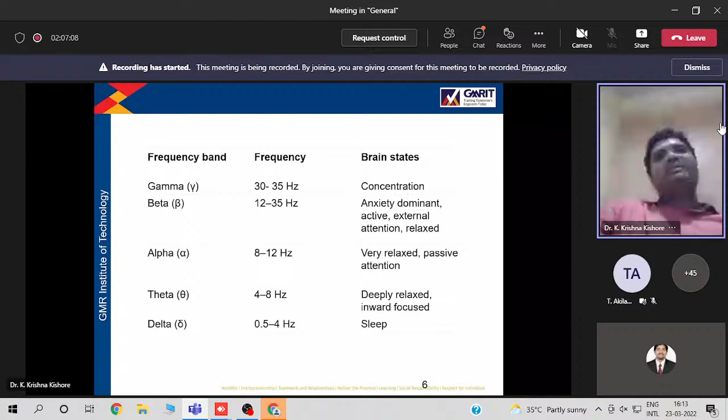Basically, we think with different frequencies. If a person is concentrating, thinking, or taking any decision with a frequency of 30 to 35 Hz, the brain is more concentrated towards his work. If the thinking frequency of the person is around 12 to 35 Hz, we call it beta, where he will have more anxiety and more attention for external activities.

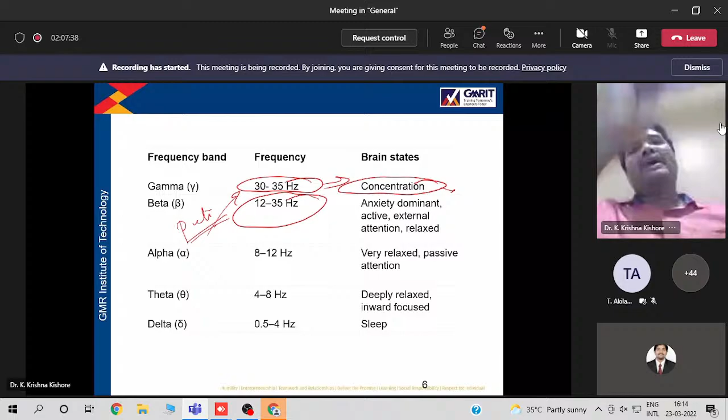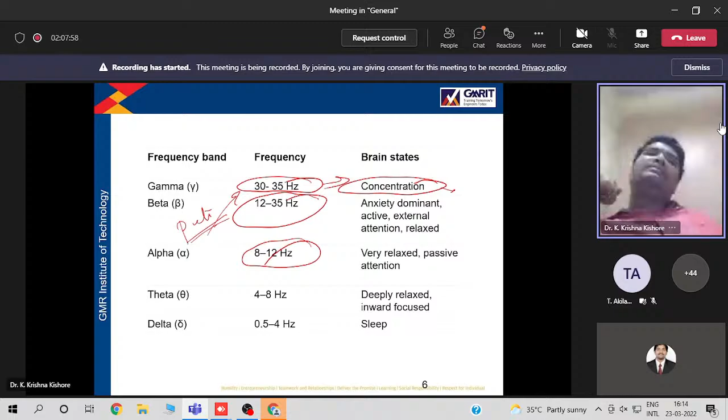If a person's frequency is around 8 to 12 Hz, that is the alpha range, the relaxation state of the mind. So when you are in a relaxation state, the frequency of your brain waves will be around 8 to 12 Hz. When you are in sleep mode, it is the delta range, where the frequency of the brain waves is around 0.5 to 4 Hz.

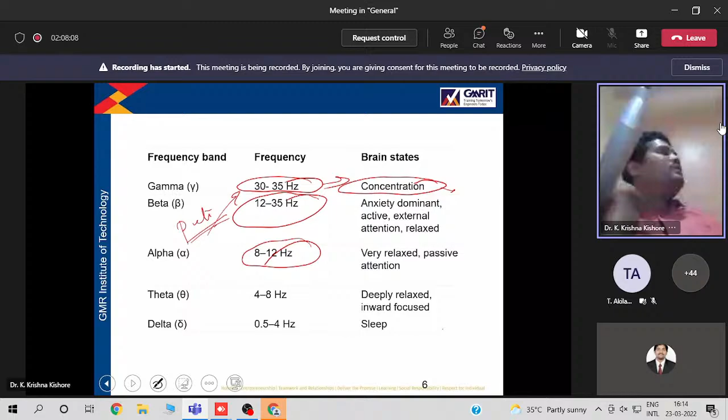So coming to the internal structure of a basic biological neuron, it will have dendrites. Dendrites are the inputs which take data from the sensory organs like eyes, touch, ears, etc. These dendrites will take the inputs and these inputs will be transferred to the cell body. The cell body, which we are considering as a processor, is nothing but the nucleus or soma. The synapse is the link between one neuron and another neuron, and the axons are nothing but the outputs.

So if you take the artificial neurons, in place of dendrites we have the inputs and we have the weights. And the artificial neuron is a combination of a linear combination of inputs with weights and an activation function.

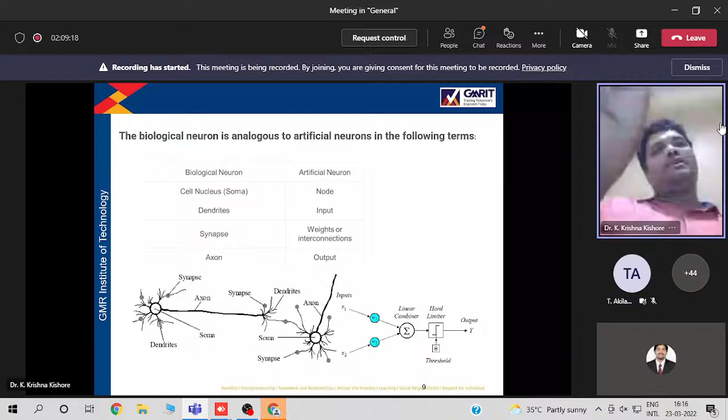So if you compare a biological neuron and an artificial neuron, what we call a cell in a biological neuron, the processing unit, is considered a node in the artificial neuron. The dendrites which take the inputs from the sensory organs are considered inputs in the artificial neuron. The synapses which connect one neuron to another are nothing but the weights, the interconnection between these two neurons. And the axons are the outputs. So this is how the model of ANN is derived from the human brain.

Usually during childhood we used to do things repeatedly, like when we wanted to learn a particular lesson, we used to learn it 10 to 15 times. When you are learning for more time, the strength of the signal generated by the synapses will be very high. That is nothing but sodium, Na plus. When the signal generated by the synapses is very high, the bond between one neuron and another will be very high, which indicates that you can remember that particular event for a long period.

So whenever you want to recall it, there is a link between this neuron and that neuron. That link is very highly bonded, so you can easily remember things. That is the major reason why during school age, teachers used to tell us to learn more times. When you do a particular task many times, the bond of the synapse link will be very high so that you can easily remember things.

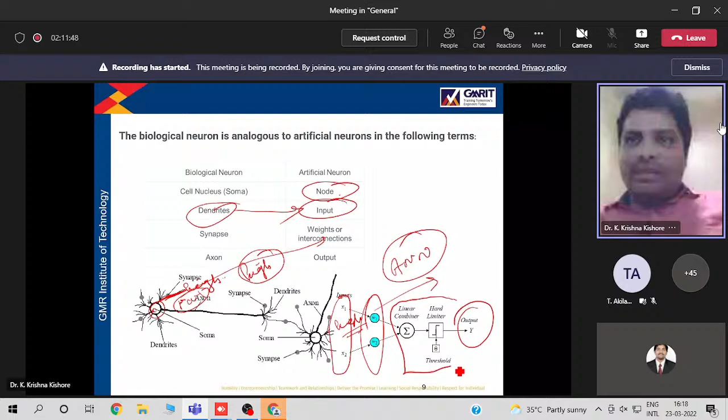So the dendrites can be replaced with inputs. The soma or cell body is replaced with the node, and the synapses, which are the interconnection between one neuron and another, are replaced with weights, and the axons are nothing but our outputs. So the basic artificial neural network will have inputs and nodes. The combination of the linear combination and threshold or activation function can be considered as one node. For simplicity we show it differently, but each neuron will have the summation of inputs with weighted vectors as well as activation functions. So this is the basic difference between a biological neuron and artificial neurons.

Suppose you take a single neuron having 5 inputs x1 to x5, and each input has some weight w1, w2, w3, w4, w5. Here the summation unit will do the operation x1 w1 plus x2 w2 plus x3 w3 plus x4 w4 plus x5 w5, and this resultant is given to the transfer function. This is nothing but the activation function. We are going to discuss different types of activation functions in the next point. Depending upon the activation function, you will get the output.

In a similar fashion, suppose any insect has hit your body, the particular skin organs will send data to the dendrites that there is a problem. This will be given to the soma or cell body, which immediately will pass a high electric pulse signal to the synapses. So immediately your hand will move and hit that insect. This is the operation that happens inside the neuron. The same thing happens here. If the weight of a particular input is very high, you will react to that particular input. So this is the structure of a single neuron.

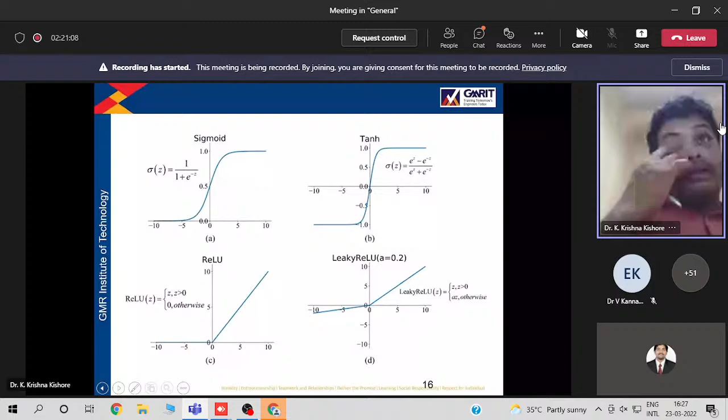And the second activation function is the sigmoid activation function, which indicates that if the value of y of x is greater than 0.5, the output of the particular neuron will be 1. If the value of y of x, which is nothing but the combination of input vectors with weights, is less than 0.5, the value of the function is 0.

In a similar way, we have the tanh function, which will have both sides. That means here the activation functions will be applicable to more than binary. If the value of the linear combination y of x is greater than 0, then the output of the particular neuron will be 1. If the value of y of x is equal to 0, the output of the neuron will be 0. And if y of x is less than 0, the output will be -1.

So when you are using the tanh function, each neuron at each stage has 3 outputs, depending upon the input combination. Suppose I had 2 inputs, and W1, W2, W3, W4. Let us assume that my intermediate output is H1, where H1 is equal to X1 W1 plus X2 W2. If this particular value, after taking the linear combinations, is less than 0, then with tanh as the activation function, that function will provide an output of -1. If it is equal to 0, that function will provide output as 0. That means this neuron output may be 1, 0, -1, which is given as an input for the next stage.

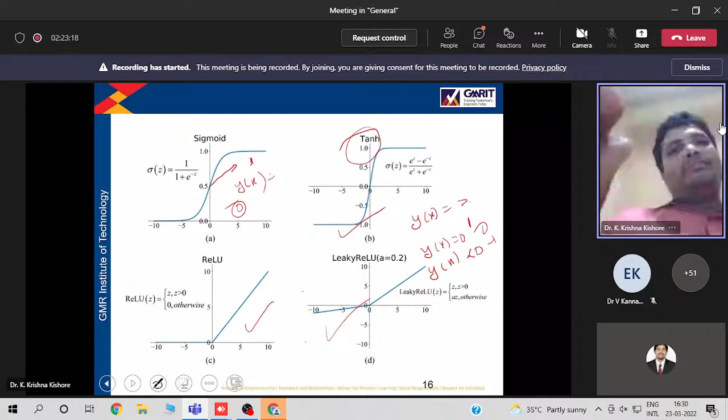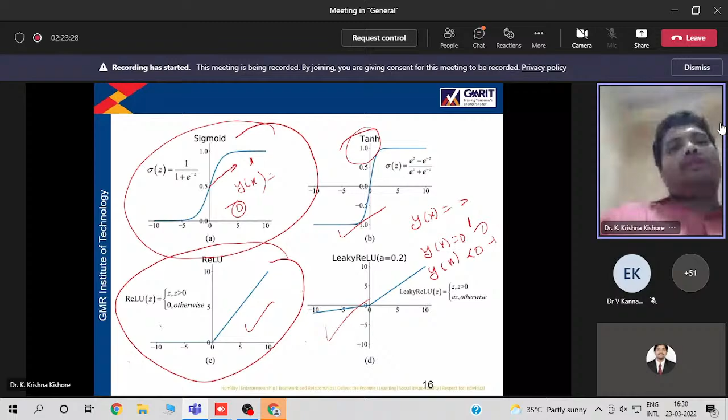Similarly, we had ReLU and leaky ReLU functions. These are the activation functions that many applications, image processing, any application, majorly go for: ReLU and sigmoid functions. And another activation function is softmax. Softmax functions are basically used at the output layer. ReLU and sigmoid functions can be used in the hidden layers, but preferably softmax functions are used only in the output layer.

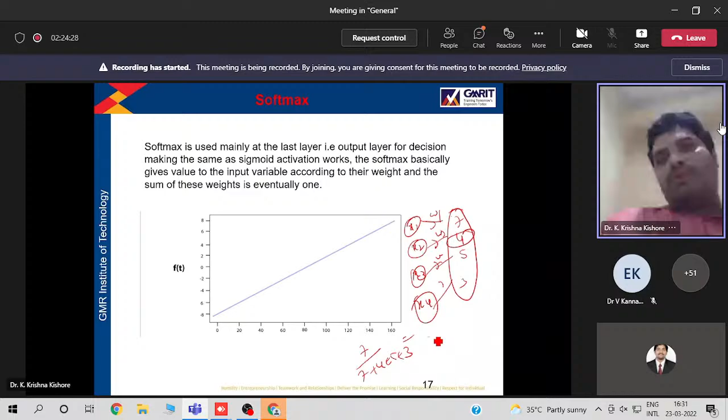The reason is, suppose I had 4 inputs, x1, x2, x3, x4, and one output layer with W1, W2, W3, W4, which produces values of 7, 4, 5, 3. The softmax function, for calculating this particular output, will do 7 by 7 plus 4 plus 5 plus 3. And if you want the output for 4, it will do 4 by 7 plus 4 plus 5 plus 3. And it will perform an exponential operation. So that is the advantage of the softmax function compared to others. So is it clear regarding these activation functions and the inputs?

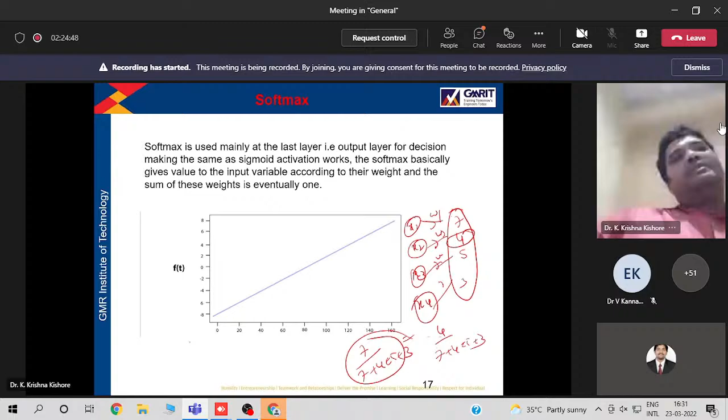Now we will go with a real-time example of how to implement neural networks for pattern recognition: the implementation of an AND gate and OR gate. Suppose you take a two-input AND gate, with inputs A and B: 0, 0; 0, 1; 1, 0; 1, 1, which produce output 0, 0, 0, 1. This is my targeted output.

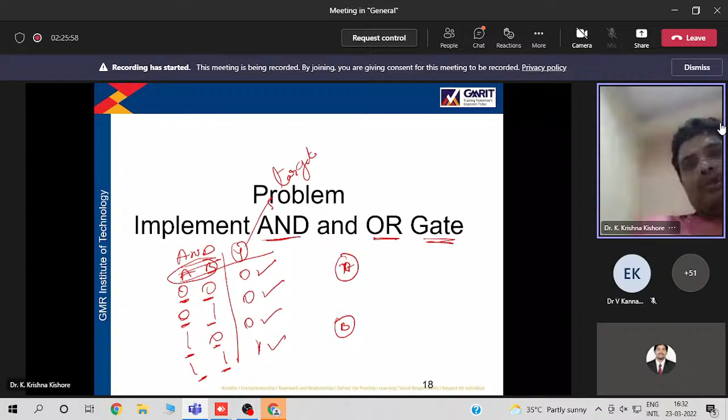See, here it is not the numbers we are talking about, it is the pattern. When the pattern is 0, 0, my target output is 0. When my pattern is 0, 1, my target output is 0. When it is 1, 0, my target output is 0. When my pattern is 1, 1, my target output is 1. Since the number of inputs here is 2, I require 2 input nodes, A and B. Now, since I have only one output, I require one output node Y, and weights W1, W2, which produce output Y.

Now, as we discussed previously, in hidden layers or output layers, each and every neuron is a combination of, though some textbooks give the activation function and neurons separately, linear summation of the input vectors with weights as well as activation functions. So here, let us assume our weights are 1, 1: W1 is equal to 1 and W2 is 1. Initially for any network, we can assume the weights randomly. Later, we have to train the network to update the weights to get the desired output.

Now, my inputs are 0, 0. In case 1, I'm considering A, B as 0, 0, and my weight vector is 1, 1: W1 is equal to 1 and W2 is equal to 1. Now, the output Y is X1 W1 plus X2 W2, the formula for this particular neural network. X1 is 0, X2 is 0, therefore Y is equal to 0. For the second combination 0, 1, and for 1, 1, what will be the Y?

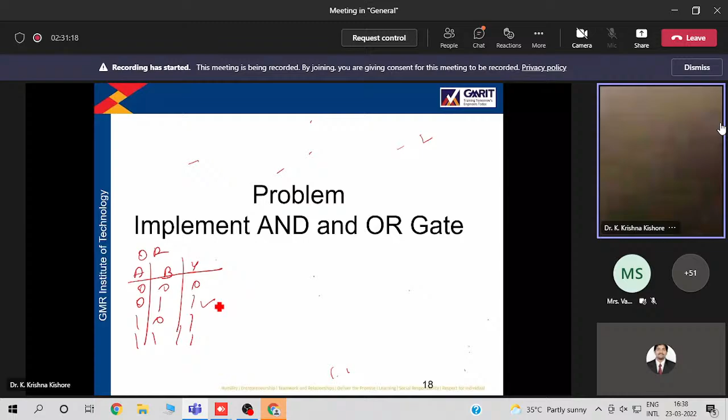So if you consider OR gate, again I'm considering inputs A and B, Y: 0, 0, 0; 0, 1, 1; 1, 0, 1; 1, 1, 1. See, in this pattern, if the pattern is 0, 1 or 1, 0 or 1, 1, the output should be 1, and this case 0. So you have two inputs. So you take two input nodes, A and B. Okay. Since you had one output, you take one output node, and W1 and W2 are the weights. Randomly consider one.

And you check what should be the value of activation function so that this particular neural network will produce a pattern of this one. As you know, this neuron is a linear combination of inputs as well as weights and an activation function. Now, by observing the data, I should be in a position to know what should be the value of activation function so that it will produce this pattern.

So as you know, y is equal to A W1 plus B W2. As we have fixed W1 and W2 equal to 1. And you apply the first case 0, 0. When you apply the first case, A 0 and B 0, therefore your output y is 0. For the second input, when you are giving it to the network, that is 0, 1, your output y is 1.

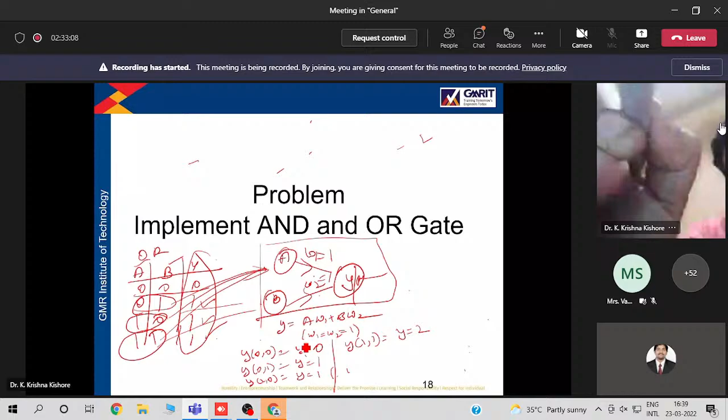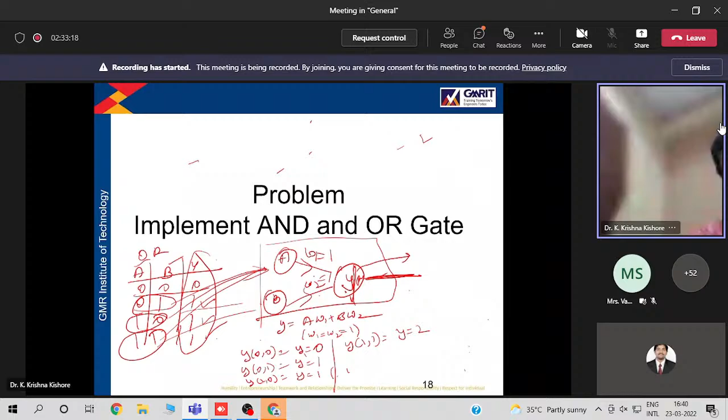For the third input to the network, 1, 0, your output y is 1. For the fourth input, 1, 1, y is 2. Now, this y data will be transferred inside the neuron to the activation function so that this neuron will produce output. Now, what should be the value of this activation function I have to take so that I will get this pattern?

Any guess from this? What should be the value of activation function? Here you observe that the output you got from the linear combination is 0, 1, 1, 2. And my targeted outputs are 0, 1, 1, 1. For these linear combination outputs, when I transfer them to an activation function, I should get this one. Now, what should be the threshold I have to keep?

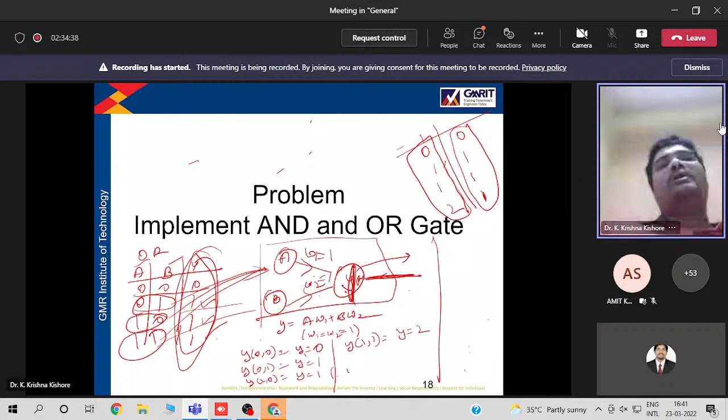Activation function is nothing but a threshold value where if your linear combination of the particular neuron is below the threshold value, it produces the output 0. If the linear combination of the particular neuron is above the threshold value, it produces the output 1. Can anyone guess what should be the threshold value here?

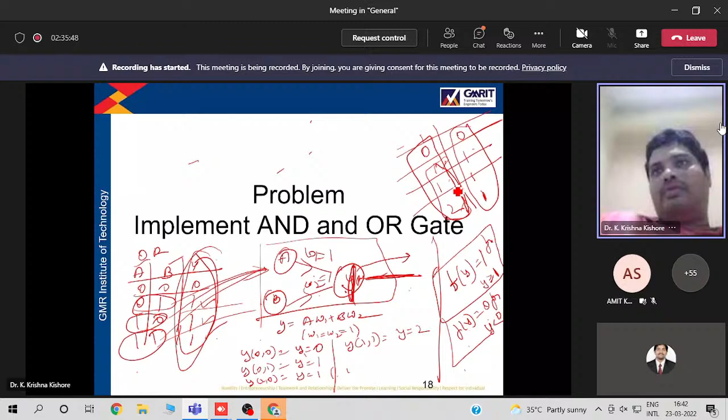Here the threshold value we have to take is: f of y should be 1 for y greater than or equal to 1, and f of y is equal to 0 for y less than or equal to 0. If I keep the threshold like this, now in the 4 combinations, I got 1, 1, 2. For these 3, my threshold is greater than or equal to 1, so the output of this neuron will be 1, 1, 1.

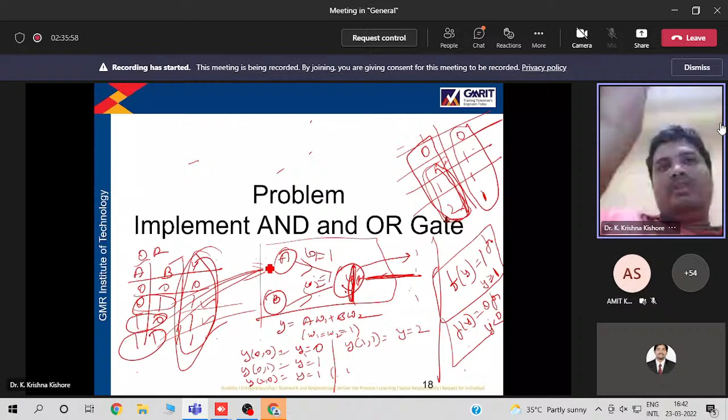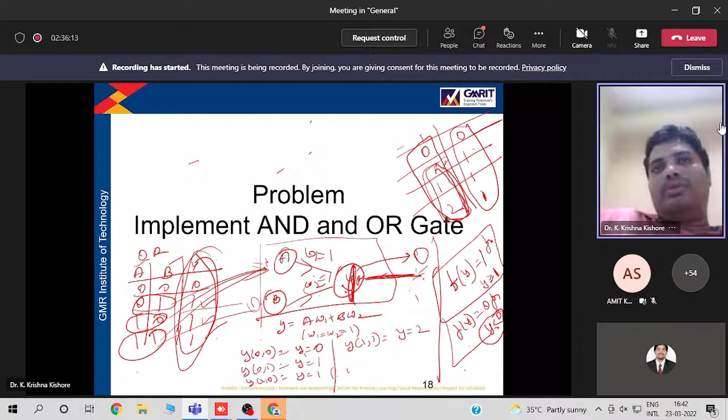And during the first pattern, when you are giving 0, 0, your output is 0. Since y is 0, for y less than or equal to 0, f of y will be 0. Therefore, this neuron output will be 0. So this network is able to recognize the pattern: it can get the output for 0, 1; 1, 0; 1, 1 as high and for 0, 0 as low. This is how you can implement any pattern recognition by using simple basic neural networks.

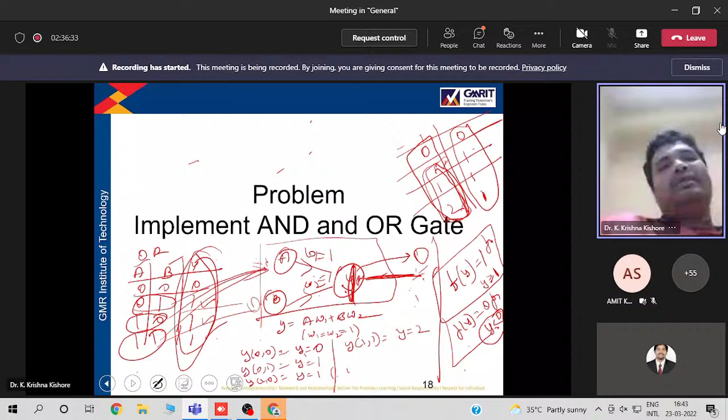And coming to the machine learning algorithms, before we are going to train, suppose if you take a newborn baby, if I give an apple to the newborn baby, she cannot recognize whether it is an apple or cherry or an orange. So what I have to do is, every time I should bring an apple and I should tell that this is apple, this is apple, this is apple. That is the training. So after a certain period, that machine or the baby is able to recognize the particular item, whether it may be a cherry or an apple or an orange.

So in this algorithm, each neuron should have an output of 3 levels. Here you have 3 classifications: cherry, apple, and orange. So in this case, you cannot use a binary classifier at the output stage, which can classify only 2 classes. So depending upon the number of outputs, we have to check your classifier activation functions.

So generally, machine learning algorithms are classified into 3 categories: supervised learning, unsupervised learning, and reinforcement learning. Supervised learning means the learning happens in the presence of the supervisor. That means you have to give the output as well as input to the machine. So the output is known and the input is known to the machine in case of supervised learning. In case of unsupervised learning, learning happens without any supervision. That means you have only the input data, you don't have the output data.

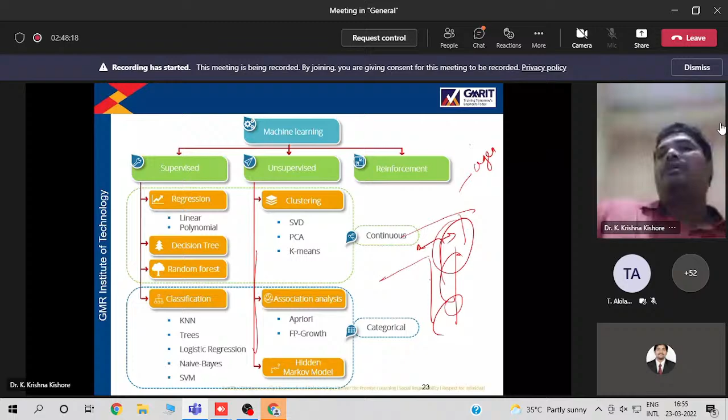Suppose at this T junction, instead of moving this side, it moves the other way, then a token is debited from the agent, and the agent should be retrained for that particular environment, and it will be stored in the data. So whenever that particular situation comes, by considering the previous experience, the agent has to perform the task. So this is regarding reinforcement learning.

So some of the algorithms we use for supervised learning, unsupervised learning, and reinforcement learning: in case of reinforcement learning, we use Q learning, R learning, and TD learning. And already we have discussed the remaining parts. And these are the applications where you can apply supervised learning.

If you want to apply supervised learning, the applications are like fraud detection in ATM cards and email spam, diagnosing whether a particular person has a particular type of disease, and image classification, which all come under classification techniques, which come under supervised learning. Supervised learning is labeled learning. That means you have to give the output label, whether a particular class belongs to cat or to dog, etc. In case of supervised learning, the other one is regression type.

Regression type is basically for prediction. So when I want to invest something in the stock market, what is the risk assessment? For those kinds of problems you can go for it. And for the prediction of stock, what is the value of a particular company? For that, you have to go for regression type. And coming to unsupervised learning, it is applied for applications like image recognition, big data visualization, face recognition, etc.

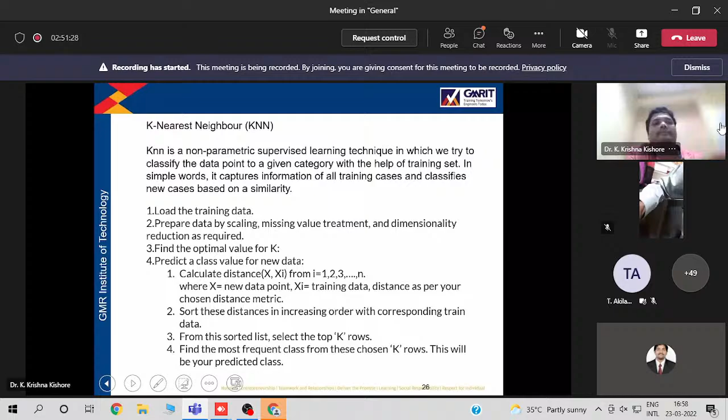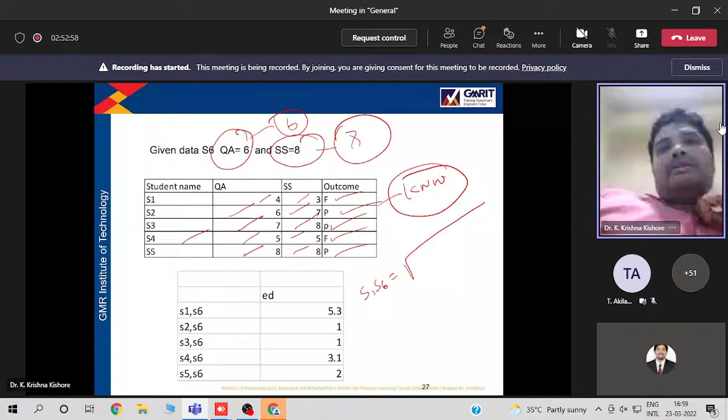Now, I have a new sample: one student who got QA equal to 6 marks and soft skills 8 marks. And I predict whether this student is eligible for placement or not. In that case, the KNN algorithm will compute the Euclidean distance between S6 and S1. That means distance of S1, S6 is root over x1 minus x2 whole square plus y1 minus y2 whole square. Here it is 6 minus 4, 2 whole square, plus 8 minus 3, 5 whole square. So the distance between S1 and S6 will be around 5.3.

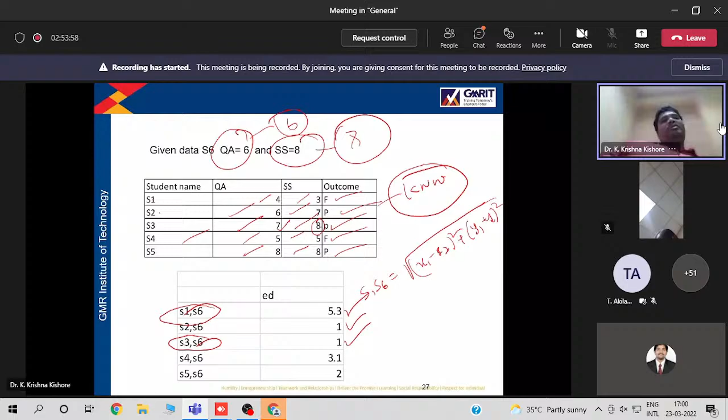In the second case, you compare the new data with S2 and S6. S2 is 6, 6 minus 6 is 0, 0 square, 8 minus 7 whole square is 1, therefore the value is 1. For the distance between S3 and S6, S3 is 7, 6 minus 7, 1. And soft skills value is 8, 8 minus 8 is 0, therefore it is 1. Similarly, compute the distance between the new test sample and the trained samples. And these are the outputs of the trained samples.

Now, when you give a new data sample and find the distances S1 S6, S2 S6, S3 S6, S4 S6, and S5 S6, these are the values. Now, here I have to define K. K represents the number of nearest neighbors. K nearest neighbor algorithm means when I am taking the decision, I have to consider minimum 3 neighbors if I assume K is equal to 3. If I keep K equal to 5, I have to consider at least 5 nearest neighbors.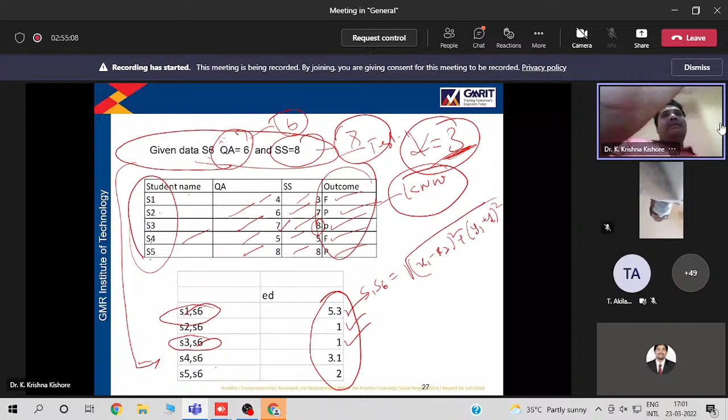Now, in this case, I am considering K is equal to 3, which indicates that before deciding on S6 data, I have to consider a minimum of 3 neighbors, the nearest neighbors. For finding the K nearest neighbors, you find the minimum values among these distances.

5.3 minus 1, 4, it is high. 1 minus 1, 0. The distance between these two neighbors is very less. So these two neighbors are very close to each other. And 1 minus 3.1, 2.1. And 1 minus 2, 1.

So if you observe these combinations, the distance between S6 and S2 is less, the distance between S3 and S6 is less, and the distance between S5 and S6 is less. So since I'm considering K is equal to 3, my 3 nearest neighbors are S2, S3, S5. Is this point clear? My nearest neighbors are S2, S3, S5 for K is equal to 3.

Since my nearest neighbors are S2, S3, and S5, I have to check what is the data or the condition of these three neighbors. S2, pass. S3, pass. S5, pass. Since all my nearest neighbors passed, I have to say that the new sample S6 is also qualified for the exam. This is how a KNN algorithm works.

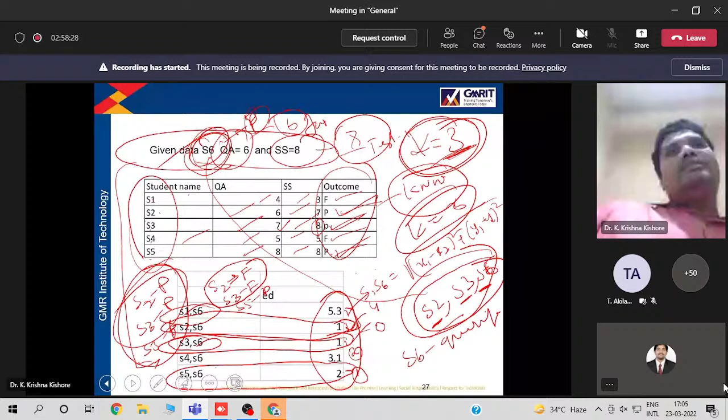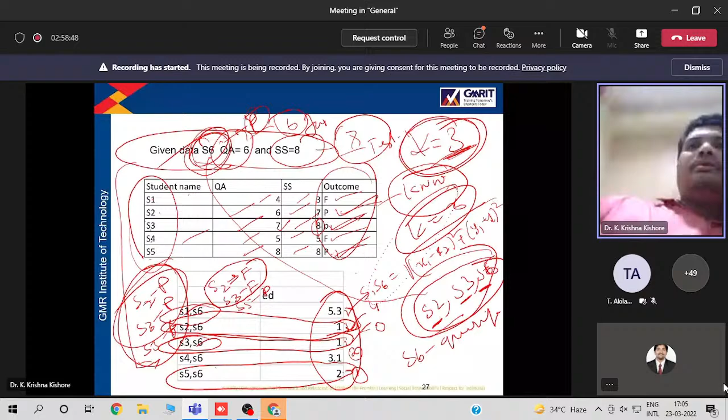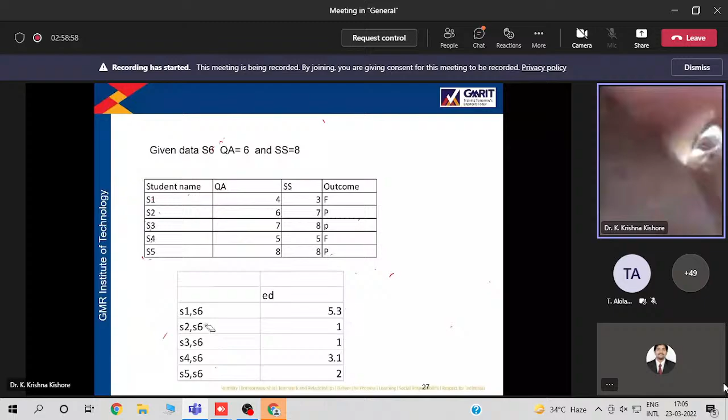See, I'm repeating the KNN algorithm. In the KNN algorithm, initially you train with the data set. Once you train with the data set, for new samples it finds the equivalent distance between the new sample and the data in the data set. Equivalent distance means it finds the distance between S6 and S1: 6 minus 4, 2 whole square, plus 8 minus 3, 5 whole square. Square root of 2 square plus 5 square is around 5.3.

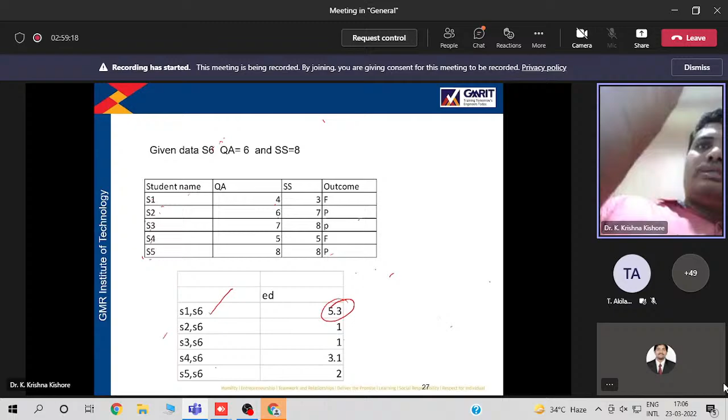In a similar fashion, it has to compute the equivalent distance to all other samples. After that, you have to find out what the value of K should be. Let us assume the value of K is 3. In the KNN algorithm, the K value preferably should always be odd.

If you take an even K value, you will come across hypothetical cases where 2 people pass and 2 people fail. Then, with 50% of the data each way, you cannot judge the new person. That is why you should always take K as an odd number. Now, after finding the equivalent distances, you have to check who are my nearest 3 neighbors, since K is equal to 3.

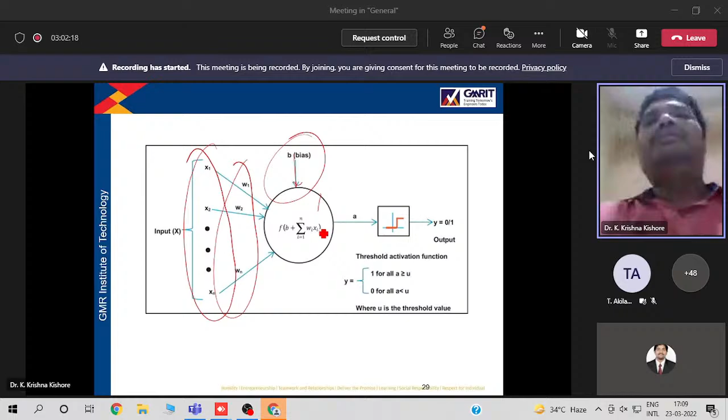After bias, you have an activation function. So this is how we are showing the activation function in a different way, but you can show the activation function inside this also. This combination together we'll call a neuron. Okay. So in the perceptron model, if this value of a is greater than or equal to some threshold value, then it will be 1, or it will be 0.

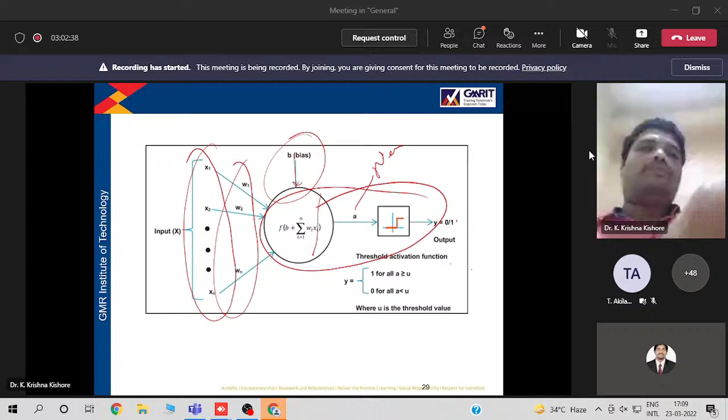Now, how will a perceptron work? Always you have to compare your output with the targeted output. When your output and target output are the same, you need not train the network using different training algorithms. If your output and your target output are different, then you have to train the network. Training the network means you have to update the weights.

Now, for updating the weights, the formula is W new equals W old plus delta W, where delta W is eta into (T minus O) into Xi, where eta is the learning rate, at what rate your machine is learning, T is the targeted output, O is the actual output of your neural network, and Xi is the input. So this is how you will update the weights until your target output is equal to the actual output.

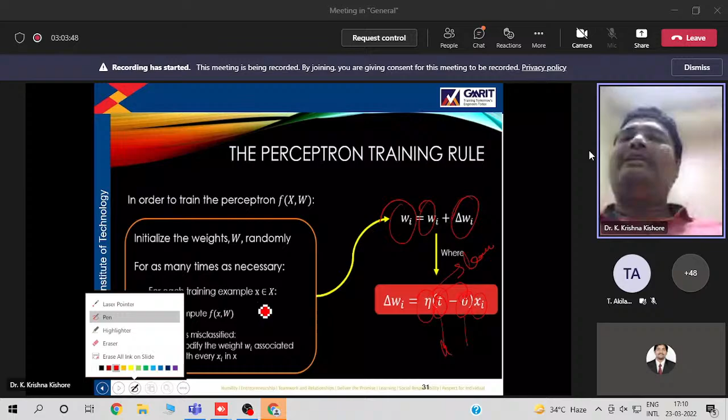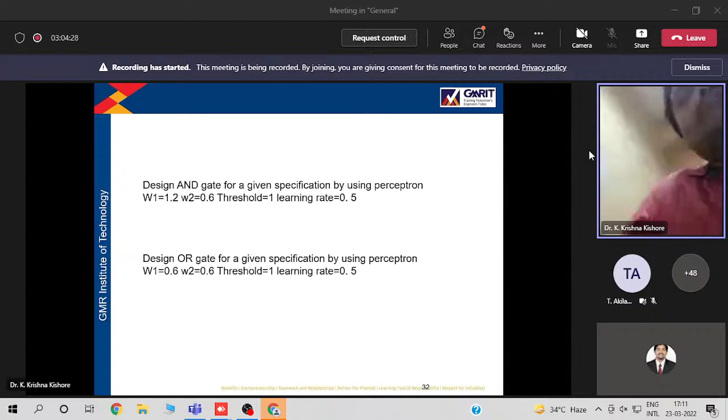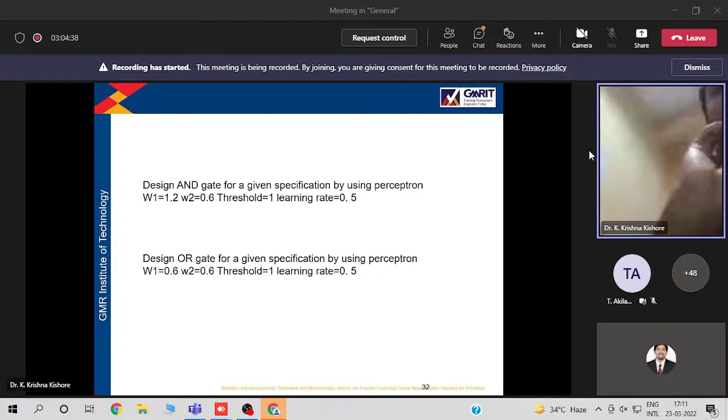Now, let us consider again a problem. Design an AND gate for a given specification by using a perceptron. Previously we designed the same thing, but there we did not update the weights. We chose the activation function threshold value depending upon our perception by seeing the output. But in neural networks or automation, the system should automatically update the weights. So we'll check one example of how a perceptron will update the weights for given data.

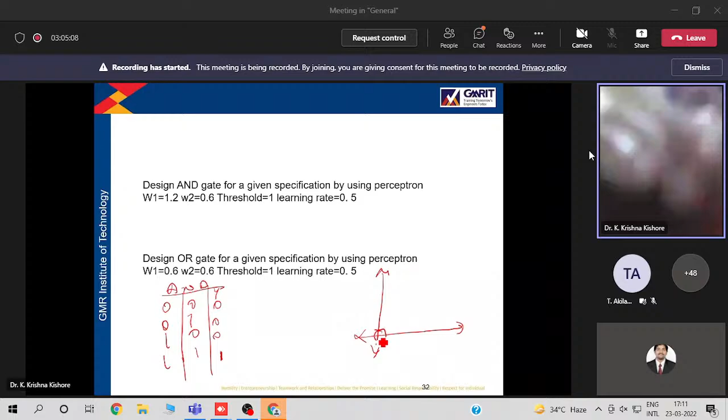And one more important point: these perceptron rules are applicable only for linear data. If I take the AND gate, my pattern is 0 0, 0 1, 1 0, 1 1, which produces output 0, 0, 0, 1. For 0 0, the output is 0. For 0 1, the output is 0. This is X, this is Y. For 1 0, the output is 0. For 1 1, the output is 1. This is a linear pattern which you can separate using a linear decision line.

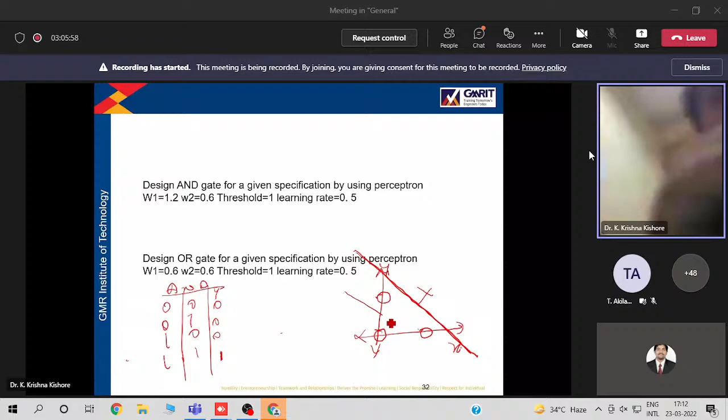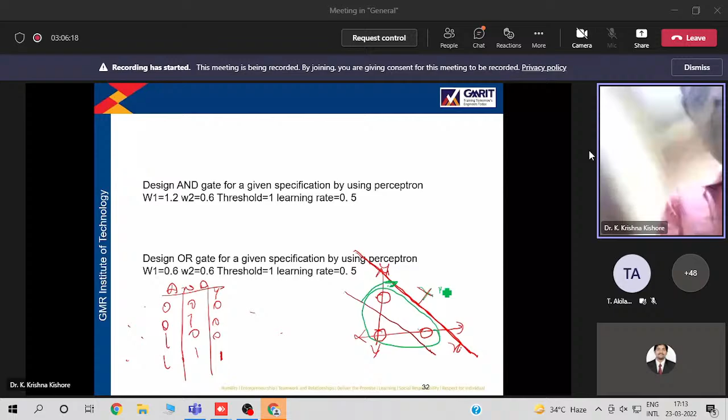Now, updating the weights means moving this decision line to separate the pattern exactly. Initially, I can randomly choose the decision line at this point. Depending upon the training algorithm, I can train the system and move the decision line to this position, so that values below this line are considered zeros and values above this line are considered 1. Only the pattern 1 1 produces 1, and the remaining patterns produce zeros. Now we will see how to train a perceptron model for this data set.

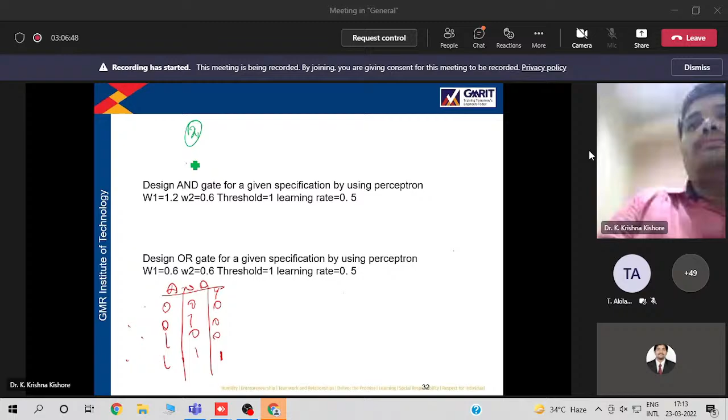Since we have two inputs, I will go with two input neurons. Since I have one output, I have only one output neuron, y. My threshold for the activation function here is 1. That indicates if the y value is greater than 1, the output is 1, and if the y value is less than 1, the output is 0. The learning rate eta is 0.5. The weights W1 is 1.2 and W2 is 0.6. As you know, y equals W1 x1 plus W2 x2.

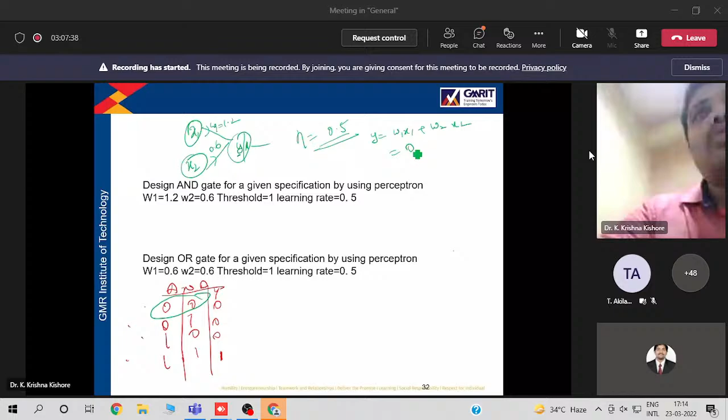I'm training the network for the first sample, 0 0. Since x1 is 0 and x2 is 0, the output is 0. This is your actual output, and the target output is 0. Since your actual output equals the targeted output, the machine passed the test. No need to update the weights, and you can go with the same weights.

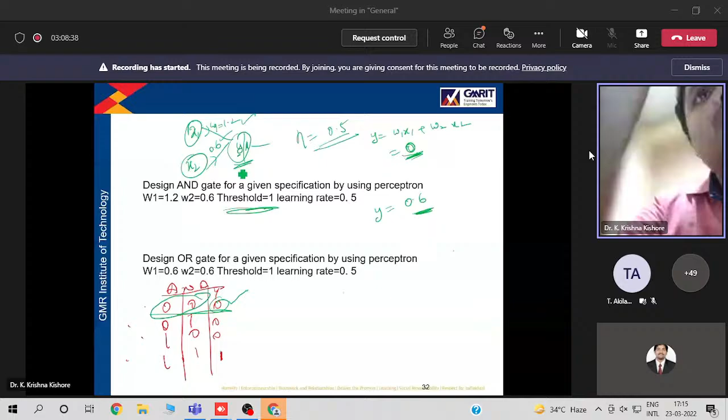For the second set, x1 x2 are 0 1, therefore y is 0.6 multiplied by 1, which is 0.6. The value 0.6 is less than the threshold 1. Therefore, this neuron will produce output 0. So your targeted output is equal to the actual output. Therefore, no need to update the weights.

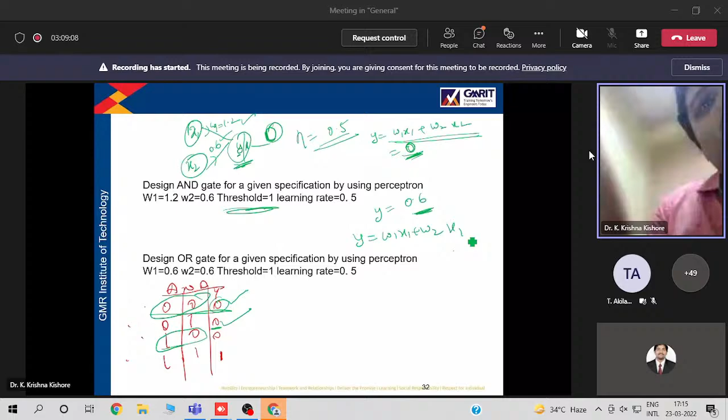Now check the third input. y equals W1 x1 plus W2 x2. W1 is 1.2 and x1 is 1, x2 is 0, so y is 1.2. Your threshold value is 1, and 1.2 is greater than 1. Therefore, your neural network will produce output 1, but your targeted output is 0. Now it is time to update the weights to get the targeted output. So what is the formula for updating the weights? W new equals W old plus eta into (T minus O) into xi.

That is x1 here. W new is equal to W old. What is W old? First I'm talking 1.2 plus eta. Eta, the learning factor, we have considered as 0.5. And my target output, what is the target output here? Target output is 0 minus actual output. What is the actual output I got? 1. So 0 minus 1. And what is x1? Since I'm talking about W1, I have to consider x1 is 1, this particular A. Therefore, it is 1.2 minus 0.5. It is 0.7. So the new updated weight value of W1 is 0.7 rather than 1.2.

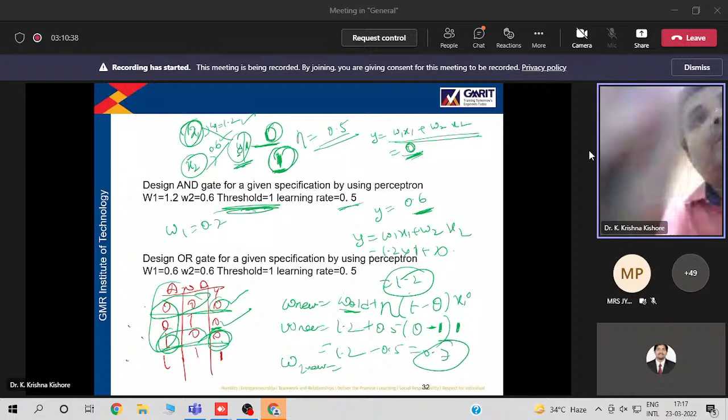Check for the second weight, W2 new. W2 new is nothing but W2 old, 0.6, plus eta, 0.5, times target output minus actual output. Target output is 0, actual output is 1. And xi, now you have to consider 0. So this will be 0, and it is 0.6. So there is no updation in the new weight. Therefore, the new weight W2 is 0.6 and W1 is 0.7.

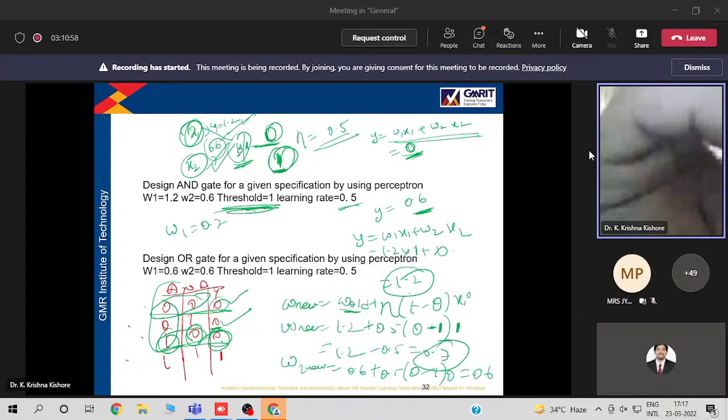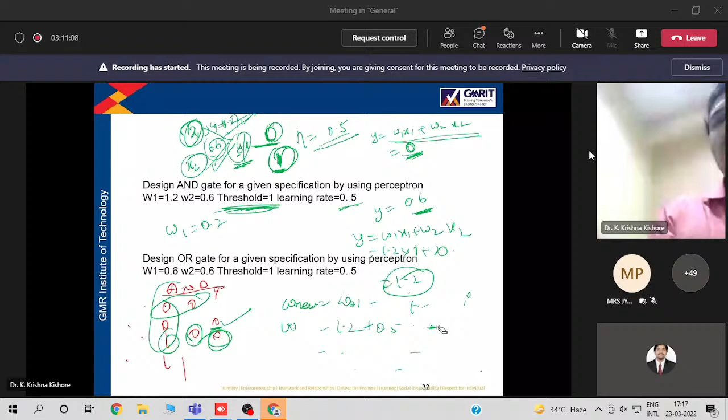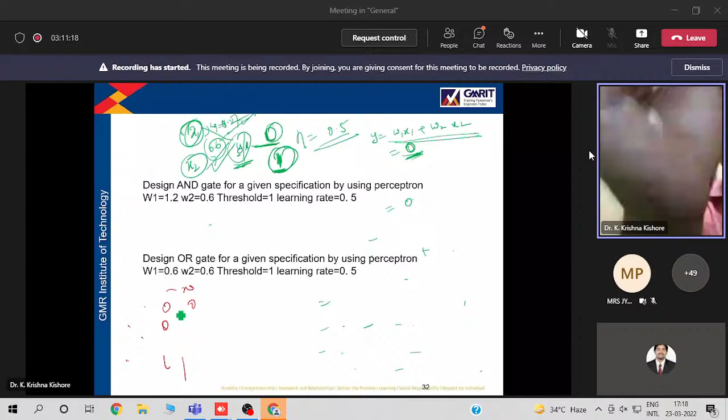Now, once you have updated the weights, you have to check the network again for all the combinations. That is important. 0 0, 0 1, 1 0, 1 1. Now again, you have to check the network with the new weights for all the combinations. What are the new weights? Now Y is equal to W1 x1 plus W2 x2. Your new weights are W1 is 0.7 and W2 is 0.6.

For 0, 0, Y is 0. Since Y is 0 and your threshold value is 1, 0 is less than 1. Therefore, this neural network will produce 0, which is the target output, so it passes the test. Consider the second case. Since x2 is 1, you will get 0.6. 0.6 is less than 1. Therefore, the output of the neural network is 0. Since the output is 0, the target output is equal to the actual output. Therefore, it passes the test.

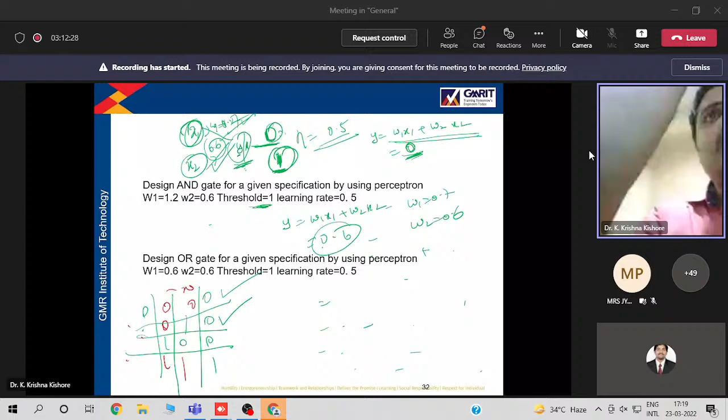Now coming to the third case, 1, 0: 1 multiplied with 0.7 and 0 multiplied with 0.6. Therefore, it is 0.7. 0.7 is less than 1. Therefore, the output of the neural network is 0. Target output is 0 and actual output is 0. So it passes the test.

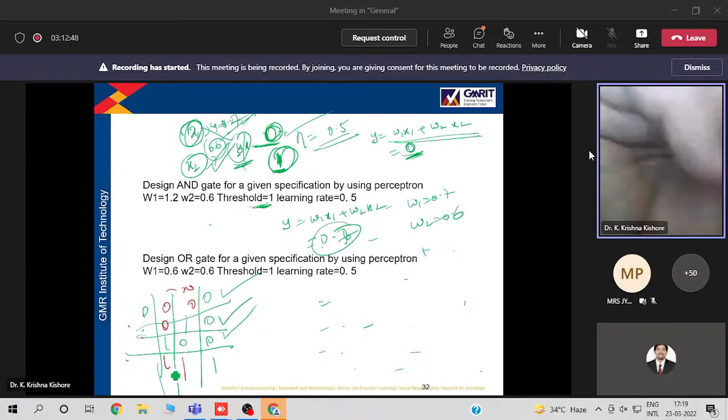Next case, you consider 1, 1. x1 is 1, x2 is 1, so y is equal to 0.7 into 1 plus 0.6 into 1. So 0.7 plus 0.6 is 1.3. Since your summation value is 1.3, which is greater than the threshold value, this neural network output will be high, 1. Your actual value is equal to the target value, and you have verified for all the data. So this is how a perceptron network will train.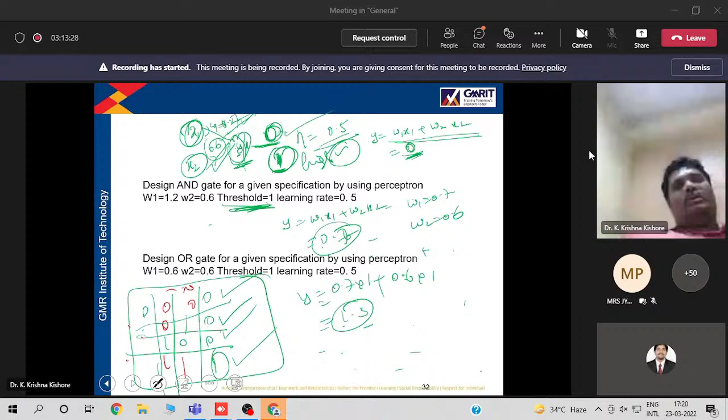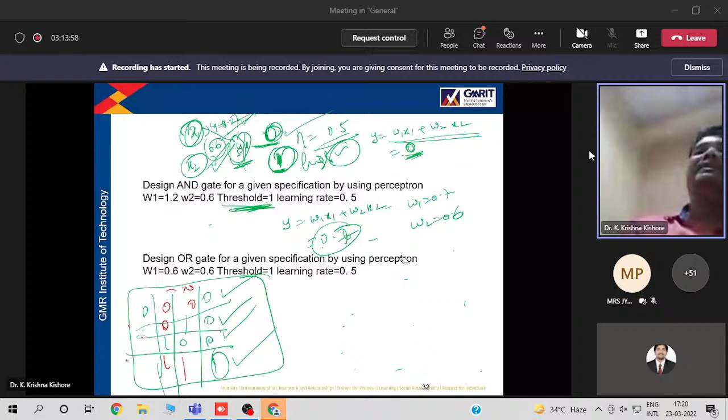Similarly, you can go with OR. The same procedure can be used for the OR operation to design the neural network for the OR gate. And the important thing here is, by using the single layer perceptron model, you cannot design an XOR gate. The reason for the difficulty in implementing an XOR gate using a neural network is that the XOR gate produces a nonlinear pattern.

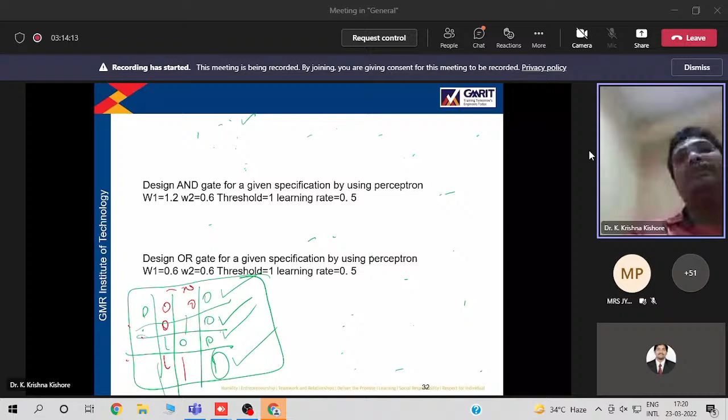If you observe the pattern of the XOR gate: 0, 0 is 0; 0, 1 is 1; 1, 0 is 1; 1, 1 is 0. So when you take a decision line, you cannot have a single decision line to separate the zeros and ones, this pattern and this pattern. This is non-linear data, so it cannot be separated by the perceptron rule. But there is another way.

For that, if you observe the XOR gate, this is the output of XOR for inputs 0 0, 0 1, 1 0, 1 1. If I use a NOR gate, the output is 1, 0, 0. And if I use an AND gate, the output is 0 0 gives 0, 0 1 gives 0, 1 0 gives 0, 1 1 gives 1. Again, if I use a NOR gate, the output is 1, 0, 0, 0.

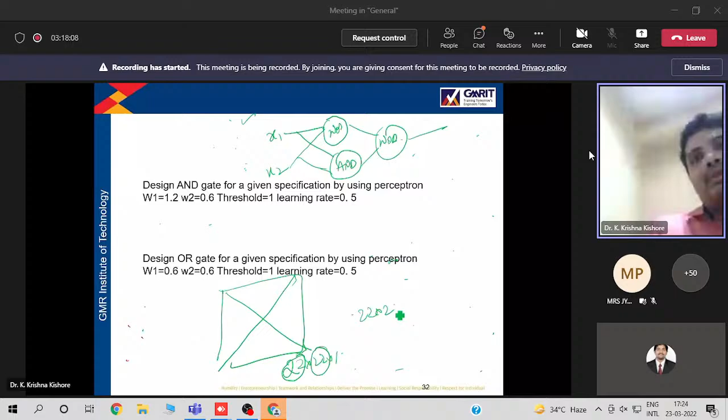Suppose if I give the system X, suppose this is a 22 by 22 by 1 matrix. To represent this image, the number of input neurons I require is 22 into 22.

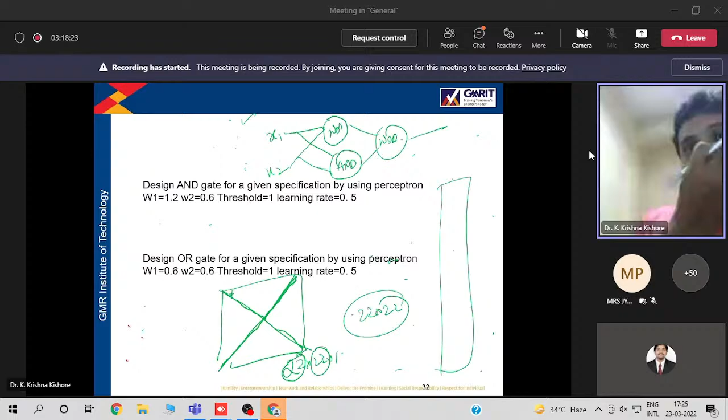And these pixel values where there is some content in the image will be marked as 1, and the remaining blocks will be marked as -1. That is what exactly is happening in the process. So this is my cross. This cross, I have marked as 1, 1, 1, 1. And where it is not having any values, I have marked as -1.

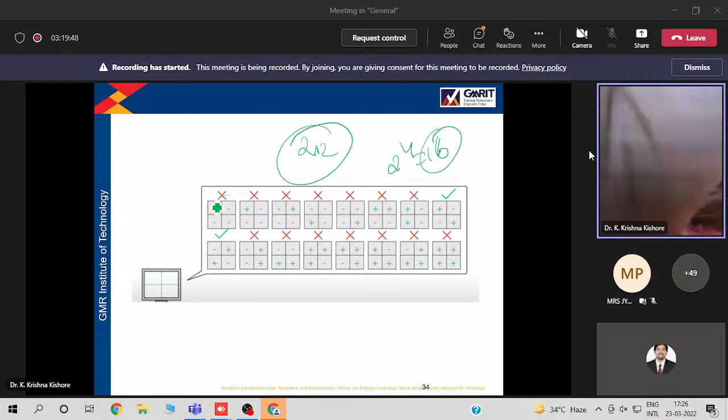So if I take a 2 by 2 mask to perform the convolution operations, I will have 2 power 4, that is 16 types of masks. You can take any of these masks. But when you are performing the masking operation, you have to select a particular mask such that it gives the maximum output. So consequently, I am considering these two masks.

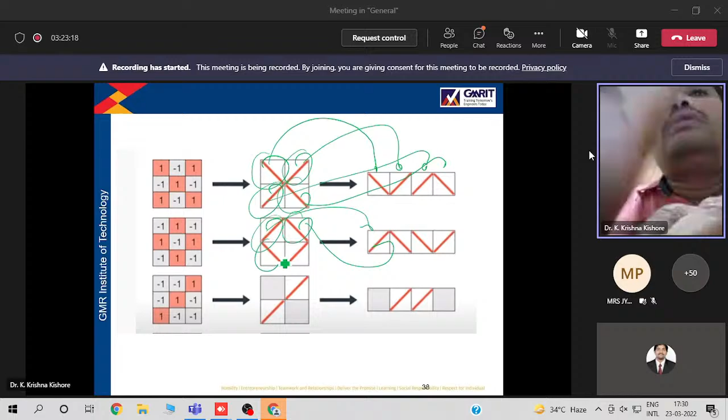Now, after this, what the pooling layer will do is take this bit of information, and next this bit of information. You are converting a 2D into a single dimension. This bit of information and this bit of information. Similarly for this bit, this one, and this one. Similarly for this one, this one, this one, and this one. So this pattern is for X, this pattern is for 0, and this pattern is for diagonal.

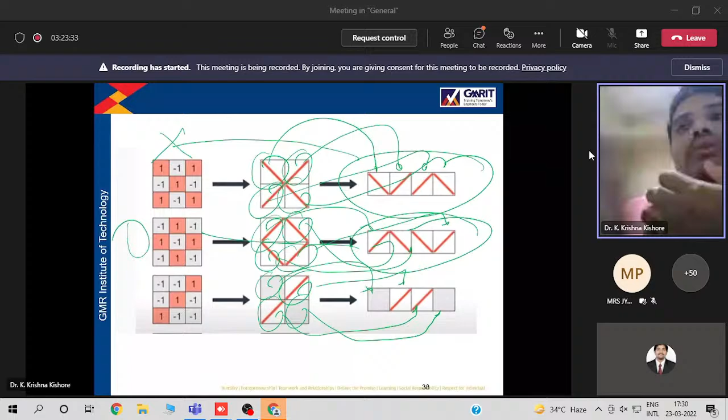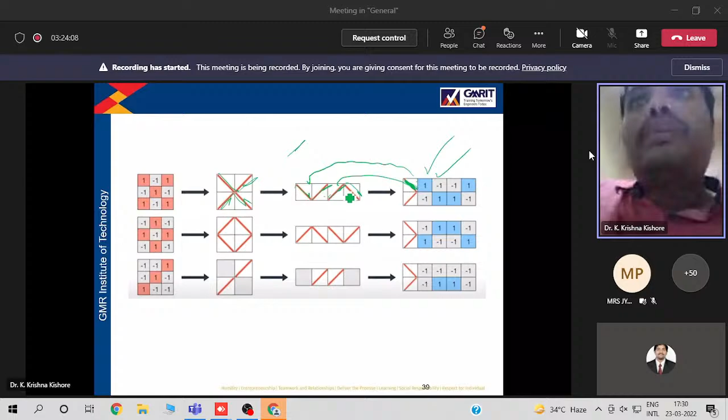Okay. Now you have two masks, one is upwards and another one is downwards. We already know that this one is this, this one is this, this one is this, this one is this. Now I'm considering this downwards diagonal. I compare this downwards diagonal with this. Both are same in pattern, so I will assign 1. Both are opposite in pattern, I will assign -1. Again, if you compare these two, both are opposite in pattern, you assign -1. Both are same in pattern, you assign 1.

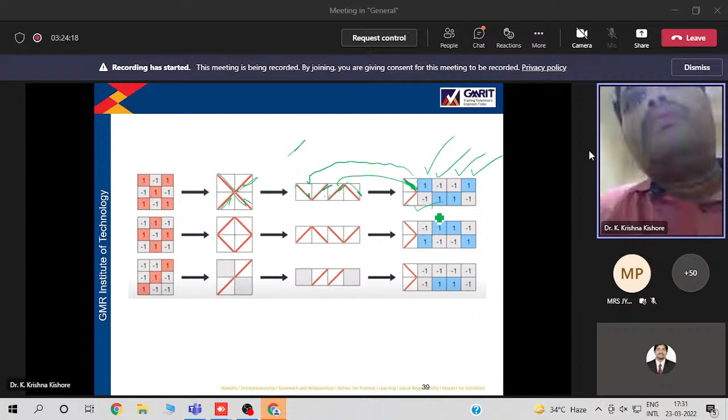Come to this one. Both are opposite in pattern, -1. Both are same in pattern, 1. Both are same in pattern, 1. Both are opposite in pattern, -1. Similarly here, opposite, -1. Same, 1. Same, 1. Opposite, -1. Same, 1. Opposite, -1. Opposite. You only see the direction. You take this block and you compare with these blocks. You take this block and compare with this block so that you will get these values.

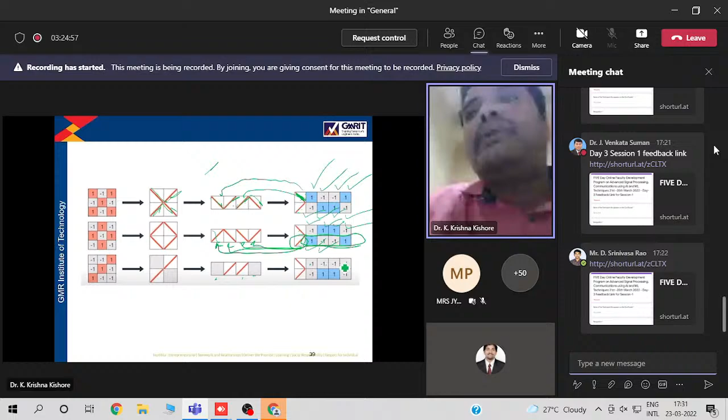You take this block and you compare with these blocks. No, -1. Opposite, -1. Opposite, -1. Opposite, -1. -1. Same, 1. Same, 1. No data, -1. So once this one is there, the filters we have used previously are these two filters. Now the fully connected layers will use these two filters to reconstruct the structure of the image from this data.

Now, in the fully connected layer, these three filters are applied. Suppose I give input as X to the machine; for the X, the pattern is this. The convolution layer and pooling layer will generate this pattern for that particular value of X. Once this pattern is generated, the function of the fully connected layer is to compare this pattern with these filters. It has predefined filters.